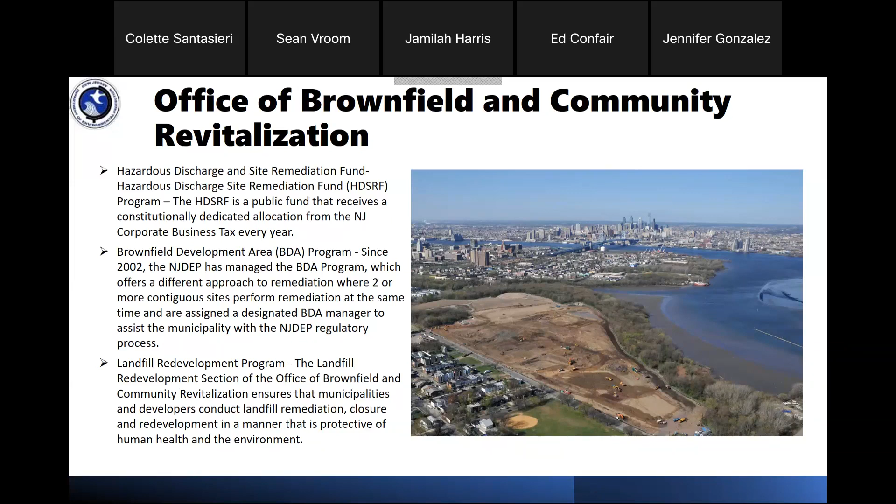The next section of our office is called the Community Collaborative Initiative, or CCI. CCI is a bridge between DEP and 12 municipalities in the state of New Jersey, and the projects we work on are partnership-based projects that promote quality of life in some of New Jersey's most distressed communities. CCI works in the community with a boots-on-the-ground approach, trying to ensure equitable economic development and enhanced public outcomes for these distressed communities.

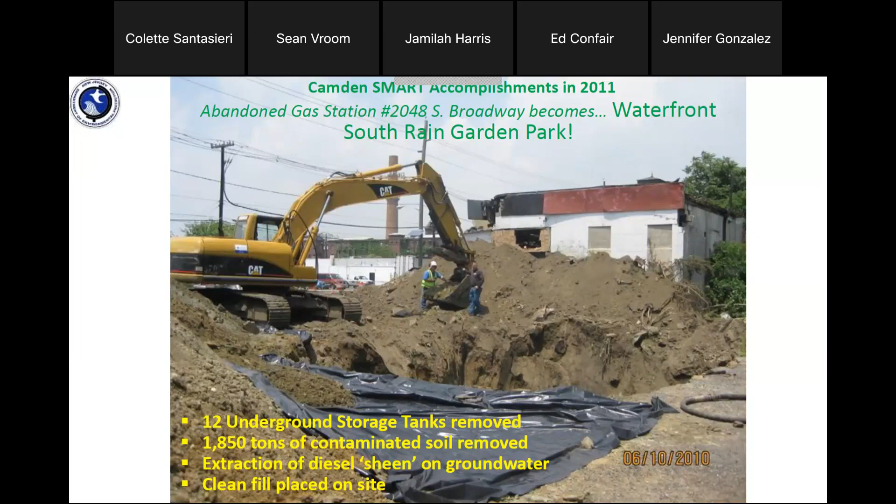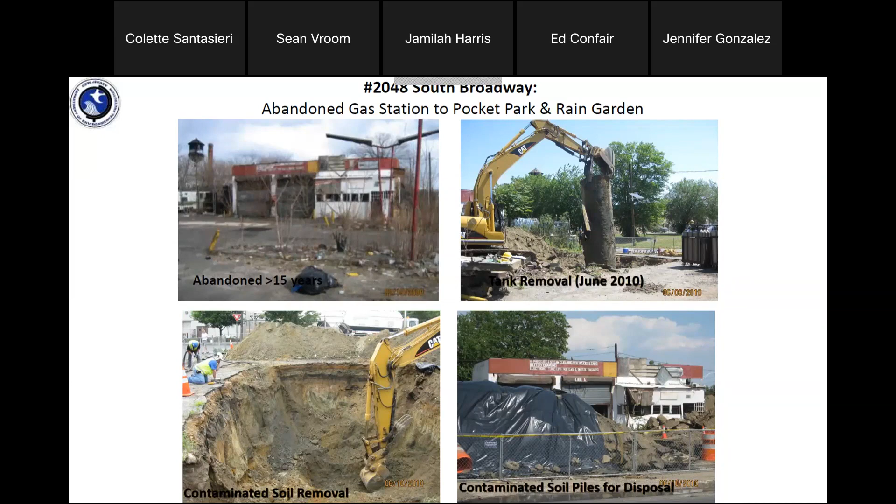This again shows the evolution of the site: the abandoned gas station, the tank removal and soil removal, and the beautiful garden that turned out at the end of the project. This was a first of its kind project for the state of New Jersey, where you take a contaminated gas station and turn it into a garden. A lot of parties were unsure that a project like this could be done, but once we had our partnerships and funding in place, we were able to move forward with executing this project.

This shows a schematic of the rain garden. There are a total of 4 rain gardens there, managing from 500,000 to 800,000 gallons of stormwater a year. The design was provided by Rutgers University, another partner. The park opened Earth Day 2012, and it provides about a half acre of green refuge and really a gateway jewel for this community that also manages local stormwater flooding.

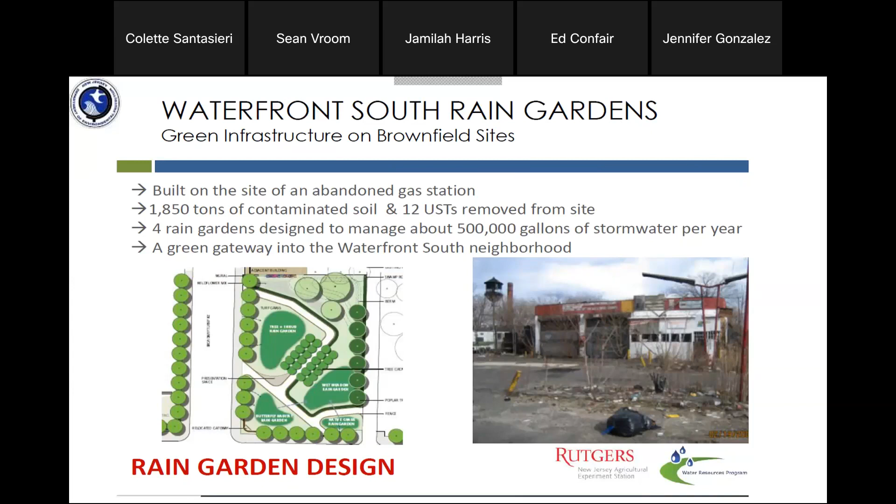Some of the hallmarks of this project were securing strong partnerships, sometimes working with nonprofits, and also being creative as far as how we were able to get the design done and the funding for the project. When you have all those pieces together, it really gives you an idea of some of the transformational projects that can happen in Brownfields.

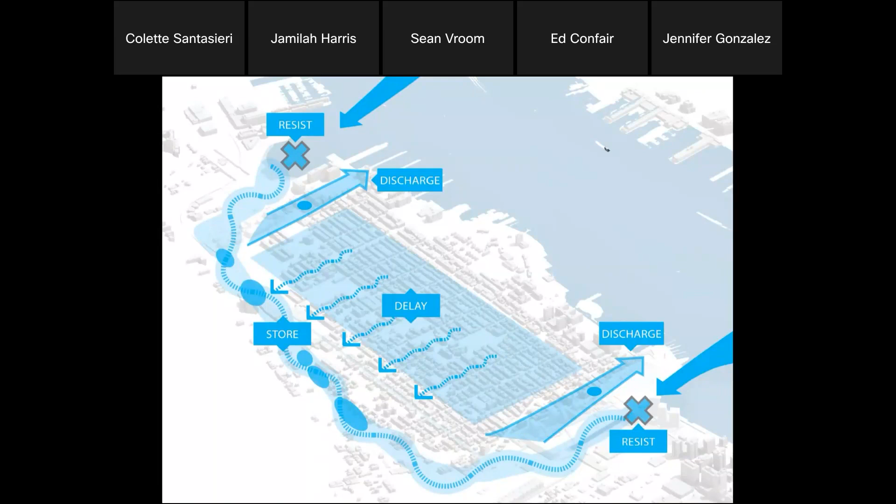So, as Jamilah said, it does take a village. You have to partner with other organizations. A lot of our resiliency efforts that we'll be talking about today are in partnership with the state, federal government, the North Hudson Sewerage Authority, and all of our local stakeholders and nonprofit organizations.

So I'm going to focus today on our parks as defense, because all three of these parks were brownfields and they are all now being redeveloped into resiliency parks.

We have one existing park at Southwest, our first park, opened in 2017. 7th and Jackson Park opened in 2019. And Northwest Resiliency Park is currently under construction as we speak, slated to open in 2023.

We'll start at the north end of town with Northwest Park, and that'll be the primary focus of the presentation, and I'll touch lightly on the other two towards the end.

So Northwest Park is in a location with historic fill. Most of Hoboken is historic fill. It was a low-lying marsh prior to 1910, then it was filled, which created this land for industrial development. From about the 1920s through 2000, it operated as a chemical manufacturing plant, Henkel Chemical.

You can see some images here of the historic factories. A lot of Western Hoboken was this industrial use, and actually our waterfront as well. Maritime industry was very significant.

When we looked to redevelop this site, it had been identified in our master plan as a new park. We have employed the strategy that every new park developed in Hoboken cannot just be a park, but can also be a flood mitigation measure.

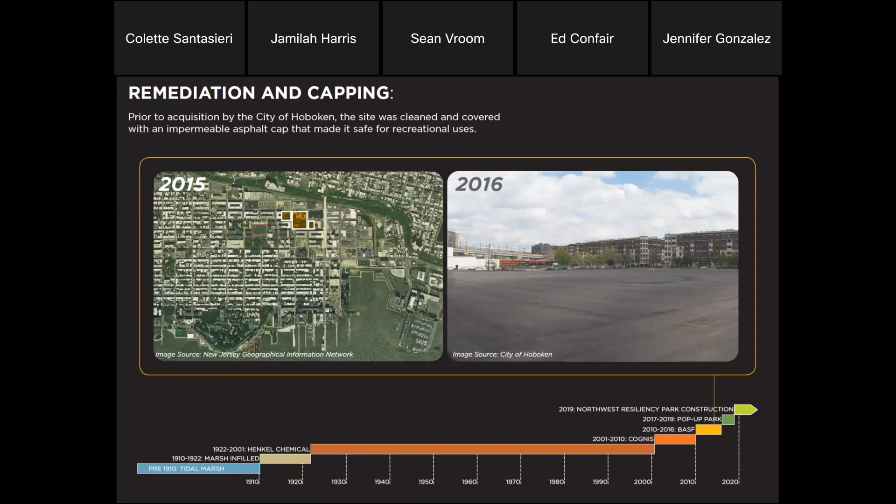During the period of design, we actually built a pop-up park, a temporary park that was on the site from 2017 through 2019, while we worked on a very significant engineering design with Ed Confair from ENLP, who will speak in a moment.

The design process was lengthy because this is a massive infrastructure project, and we wanted to make sure the public benefited from the park in that meantime. So we developed this pop-up park, and it was actually a great asset to do community engagement for the design of the permanent park.

The site had been temporarily capped, as you saw in the previous picture, and our design team's philosophy was effectively, let's keep as much of the soil on site as we can. So we needed to make room for the water.

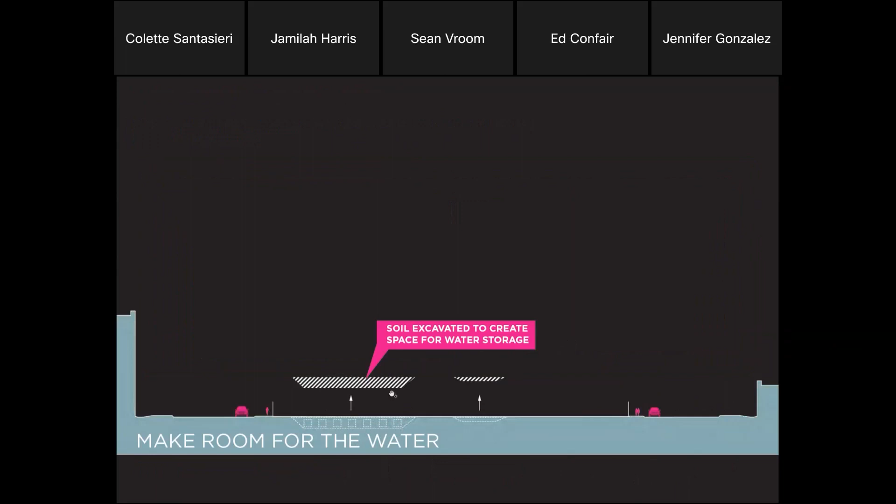This image depicts the underground tank that you'll see in a moment, where we excavated the soil and actually kept it on site to create topography and create a really interesting park design. Real kudos to ENLP and Olin, who developed this innovative park design for the city of Hoboken.

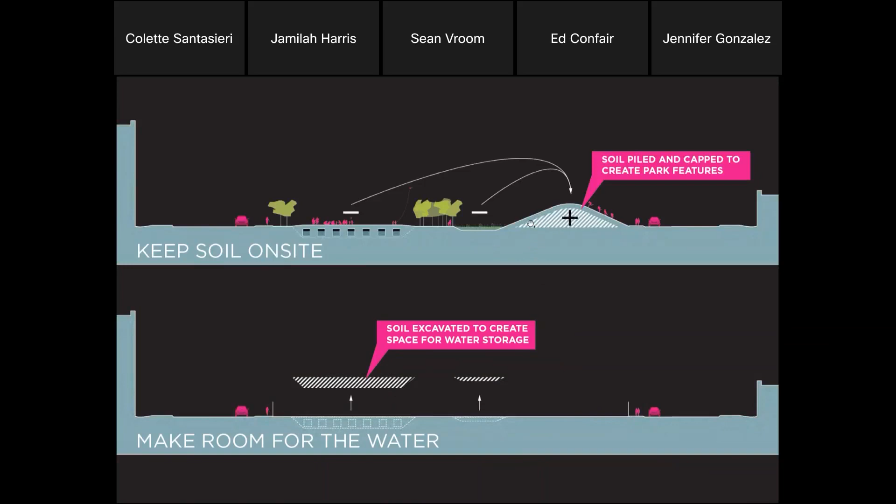The soil that was kept on site then became the topography, which was then capped with a variety of different surface treatments, whether that be pavement for plazas or sidewalks, grassy areas, or the fields you'll see in a minute. We had a variety of different types of capping that are being, as we speak, reinstalled on the site. The original asphalt cap done by the prior owner prevented rainfall and water from reaching the contaminants below the park.

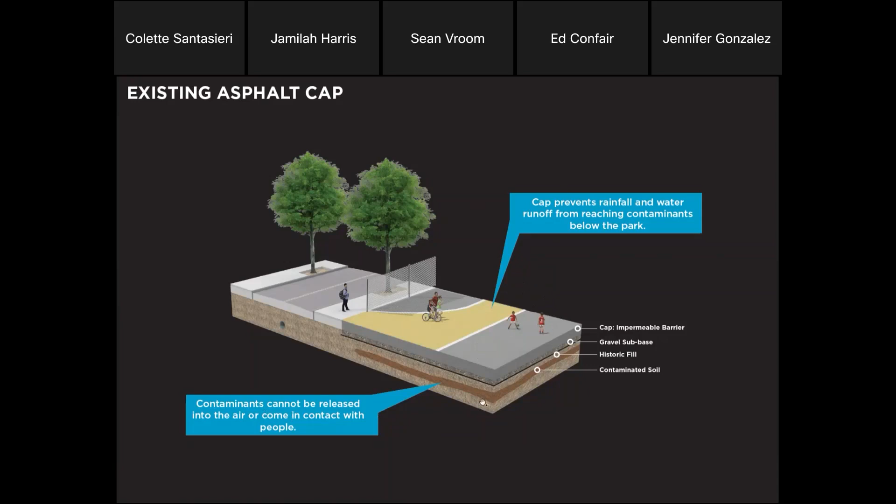So obviously we want to restore the cap. In doing so, we'll be installing at least 2 feet of soil and vegetation that will serve as an engineering control to protect public health and safety.

We'll also consolidate everything that can be kept on site. Of course, some soils did have to be removed, but we did manage to achieve zero net fill and keep as much on site as possible, creating a more natural cap for the site.

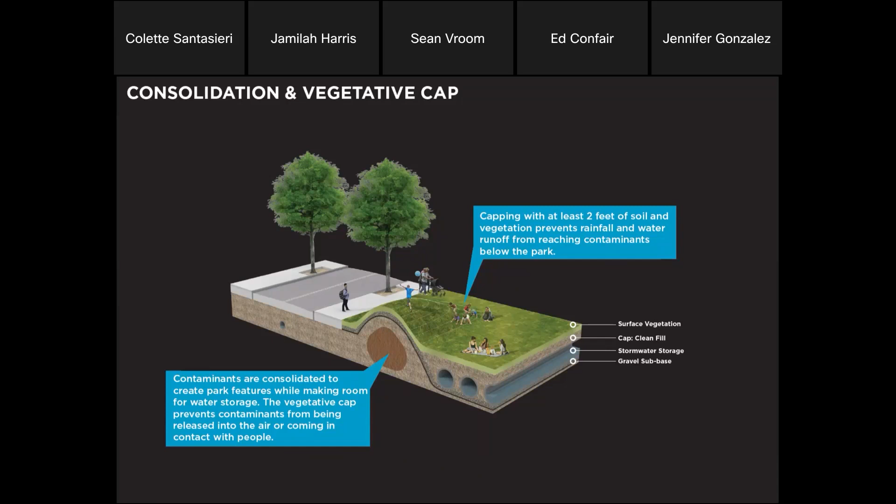And this is what the site will look like. This will be our largest resiliency park at about 5.5 acres, and it will feature a multi-purpose athletic field with a series of rain gardens, which we'll go into on other slides.

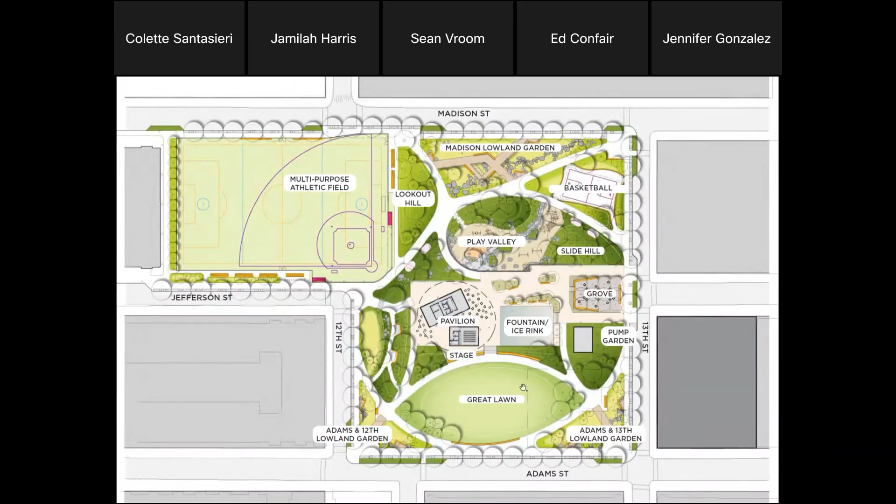A basketball basin that also stores stormwater, a play valley, and a central civic terrace that is actually the main elevated portion of the site, under which a lot of that soil was moved, and then a great lawn for events and movies. Here's a bird's eye view of the site, and I can't wait to put this next to what it actually looks like in 2023, but we will show you some current pictures of the site under construction.

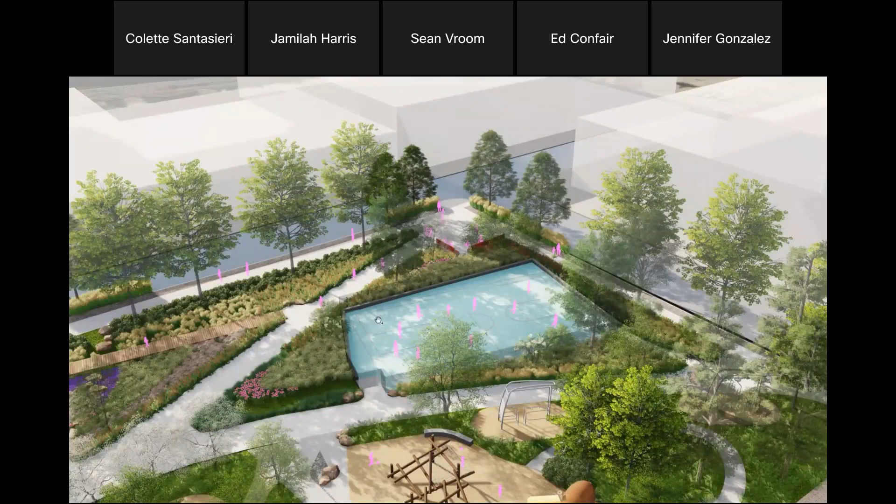This is the basketball basin that I just referenced. I wanted to give you two renderings that showed how this area was excavated and depressed, whereas this civic terrace was actually elevated. We were moving soil around efficiently to make sure that we met the net fill requirements, but we also had to haul away as little as possible.

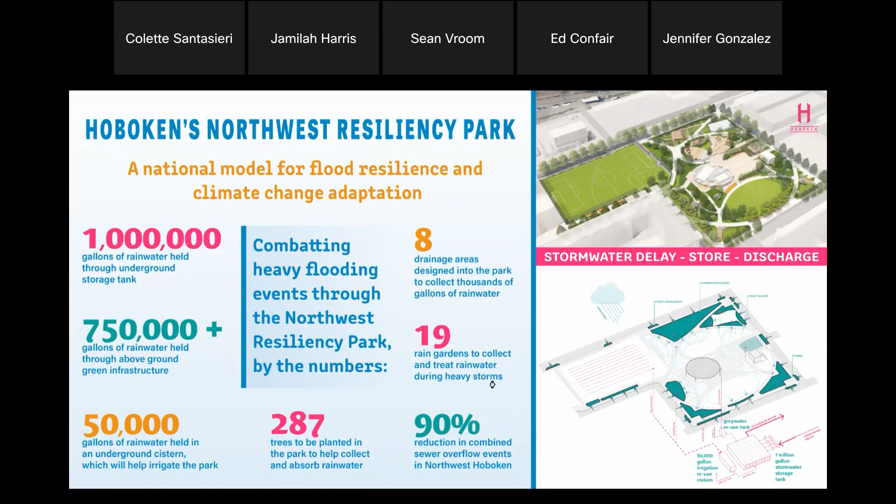In summary, here's the impact of the park in terms of climate adaptation. We are storing 1 million gallons of water in an underground tank. We are also managing more than 750,000 gallons of stormwater on site through rain gardens and green infrastructure. There's also a cistern that will be used to irrigate the site, storing 50,000 gallons of water. We have about 300 trees that are going to be planted on the site, and a 90% reduction in combined sewer overflow events as a result of this park's stormwater management measures.

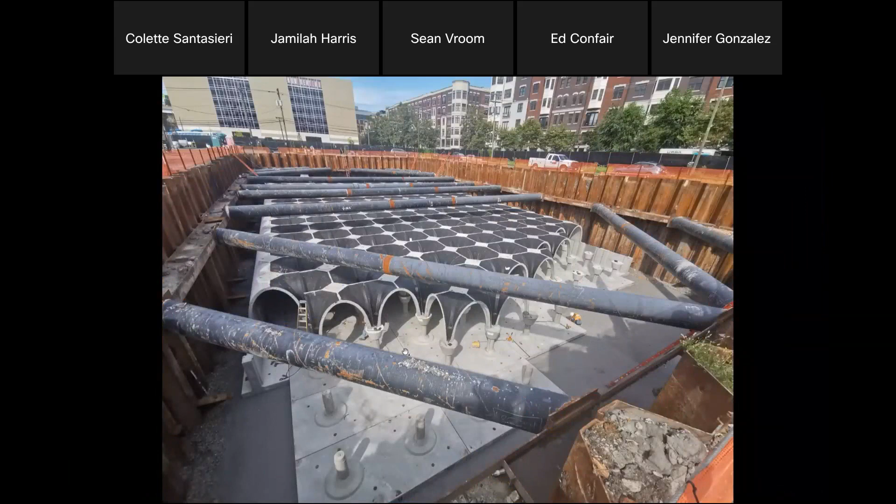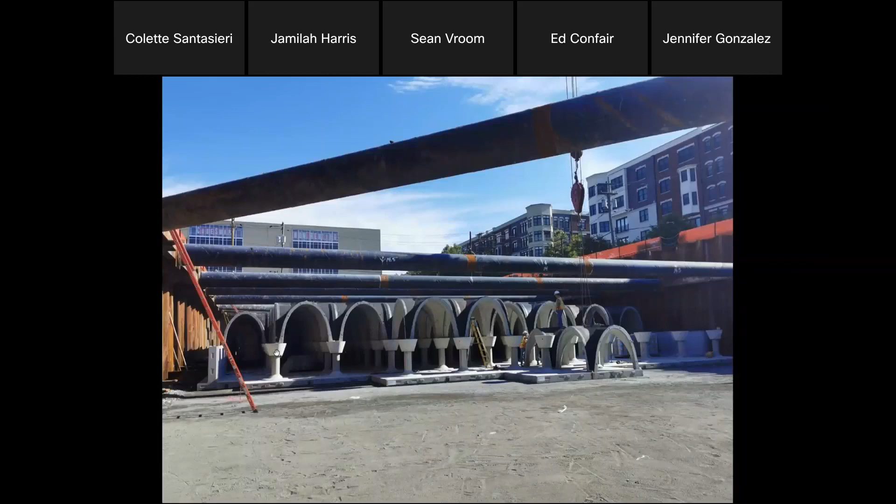Here's a view from the north. It is almost the size of a city block. This park is kind of a super block, and the tank takes up about half of it, but you would never know it from looking at the park as we stand today. Here are the chambers, a view from underground, and this is actually a view from inside one of them—so, the tank, not just one. Those are the features underground doing the flood mitigation work, while also keeping this brownfield site capped for recreation purposes, and turning it into a beneficial use for our residents who are demanding open space.

Moving on to 7th and Jackson Park, the unique thing about this site was that it was entirely developed by a private developer. This field is on top of a series of PVC pipes that you'll see in the next slide. It's just about a 2-acre project. It stores 466,000 gallons of stormwater runoff, developed by a private developer and then turned over to the city.

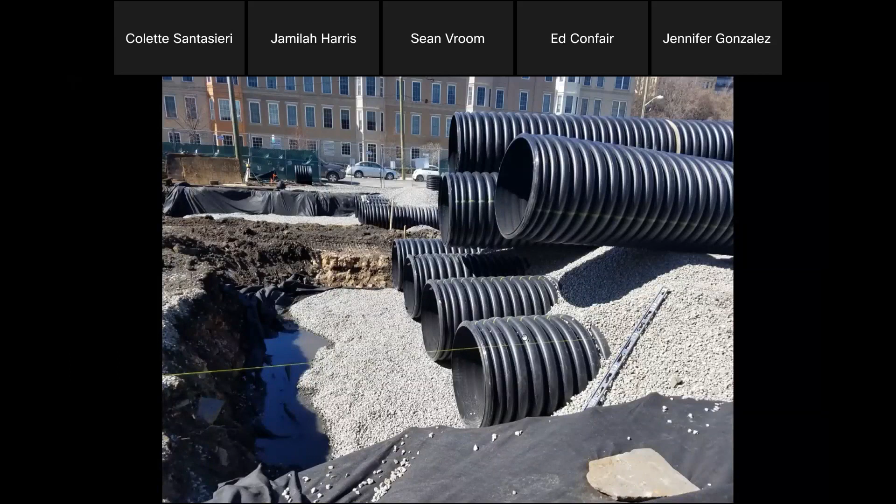It was part of a larger redevelopment project. This is the image of the types of pipes that are actually underneath that field. We were able to do this at no cost to the taxpayer. Through this redevelopment process, we were able to leverage an innovative way to finance the project, but also have the project built by a different third party. We now operate and maintain the park, in partnership with the North Hudson Sewerage Authority, which maintains the underground infrastructure for stormwater management.

Very similarly, Southwest Park, our original resiliency park, was also a brownfield. This is what the park currently looks like at the surface. All of these pavers are permeable pavers. These are rain gardens—there's a series of rain gardens and stormwater trees. There's also a cistern on site and underground detention, similar to 7th and Jackson, which manages, all told: the permeable pavement, the stormwater trees, the cistern, and the tank—altogether just under 200,000 gallons of stormwater management on the site.

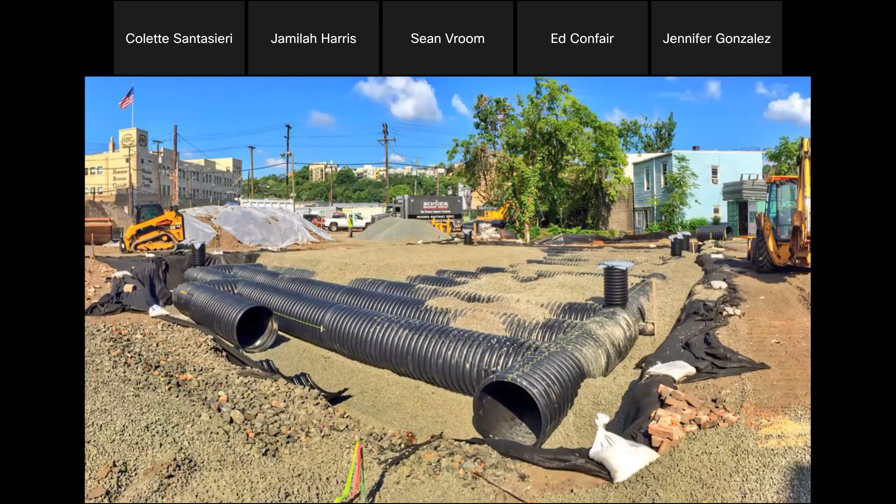I should have noted that the former use at the 7th and Jackson Park site was a Levolor blind factory. And the former use at this property was a parking lot. There were previous industrial uses prior to that.

So that's a little bit about our brownfields remediation, and I welcome you to email me with any questions. Our website is there, and on that website you can find links to specific project pages for each of those 3 parks, as well as our overall flood mitigation and climate adaptation strategies.

Okay, thank you so much, Jennifer. I want to thank Jamilah and Jennifer for giving us some great examples. And as you can see, they're very different examples, and we chose those by design.

Jamilah's example was a small site—a gas station that had been sitting for years, and the community wanted something done. Plus they had flooding issues and needed something addressed there. Whereas the example of Hoboken was a citywide strategy, very different, looking throughout the city at how to handle floodwaters, and then using parks as a defense strategy while looking at their brownfield sites.

The reason we chose these very different examples is to show communities that there are many different ways of dealing with these issues, and many different ways of viewing the redevelopment of your brownfields through the lens of resilience. So thank you again, Jamilah and Jennifer, for those examples.

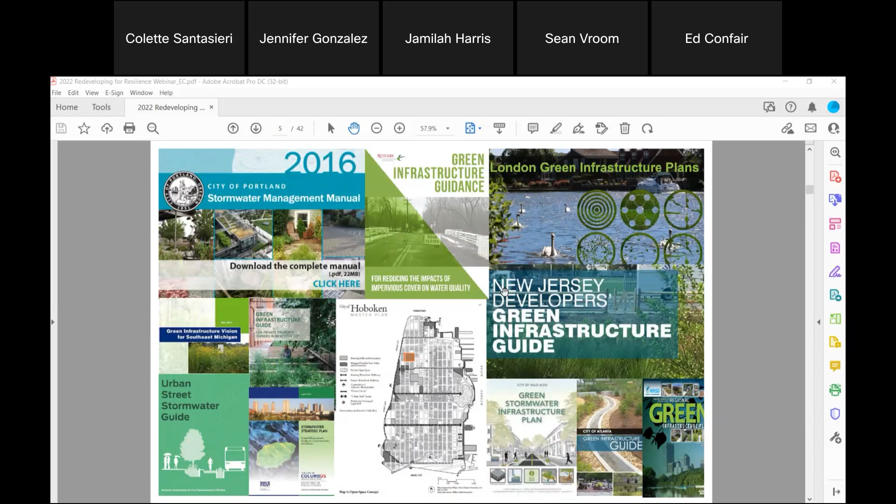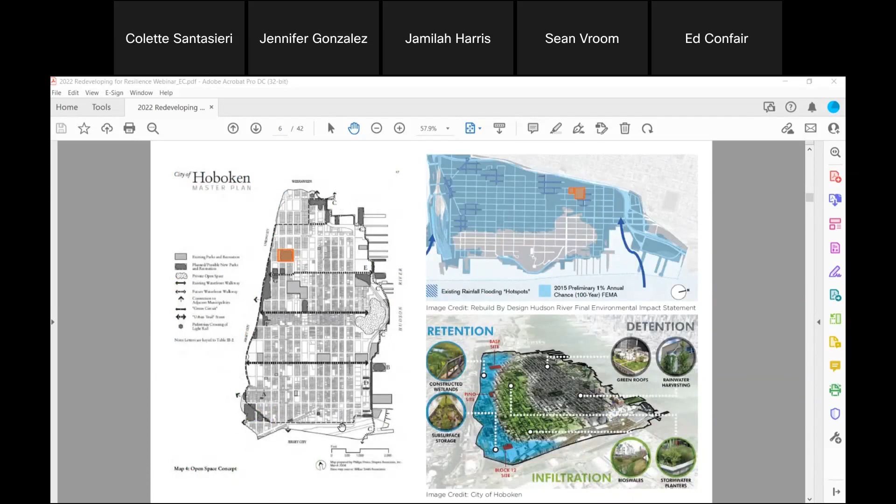To use an example, looking at what Hoboken did with Northwest Resiliency Park, the point I want to make is to look at both your master planning, your comprehensive plans, your recreation and open space inventories, and overlay them with the most recent flood mapping and your infrastructure inventory, such as your CSOs, if you're in a CSO area. Coordinate with your municipal utility authority on where your sewer sheds are, where your stormwater systems are. The point is you're looking for synergies and overlap. So from a municipal point of view, you want to find where you own land, or where there's blighted or brownfield land that can be useful where you're also having flood or resiliency issues.

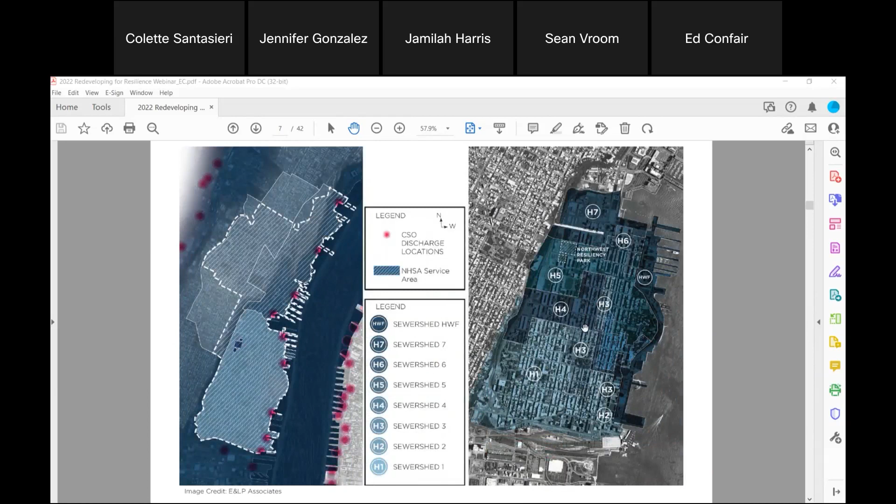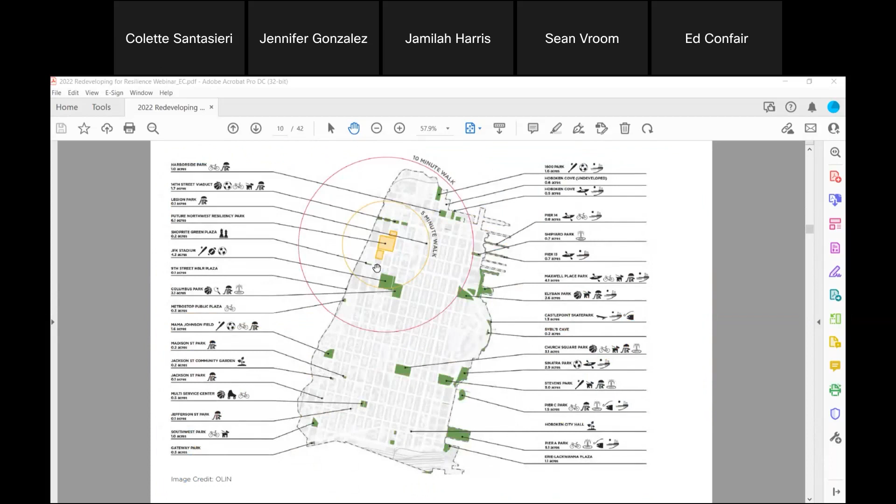And then you want to pair that with the social aspect. Community engagement is an incredibly important part of these projects—getting public buy-in, making sure people feel safe, that you're creating places of refuge, that you're improving their neighborhoods, and that you're listening to them about what they want to see on these areas as they're improved, programming the sites in a way that fills gaps for amenities that may be missing in neighborhoods.

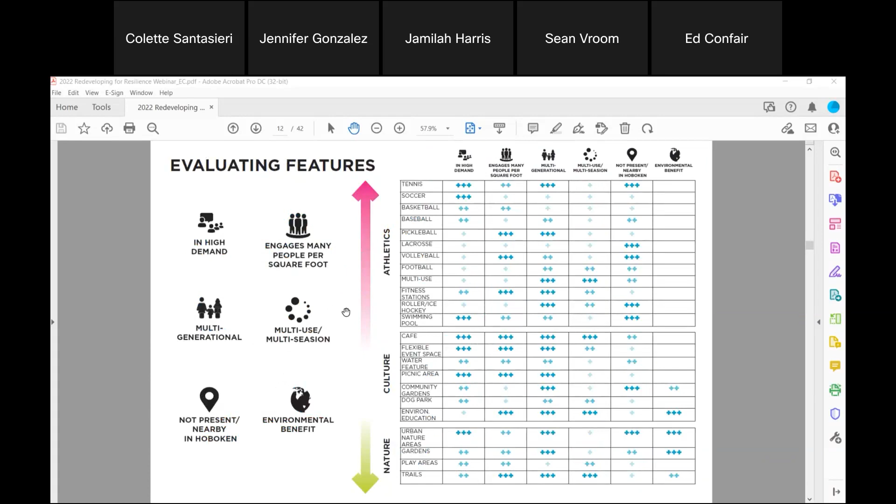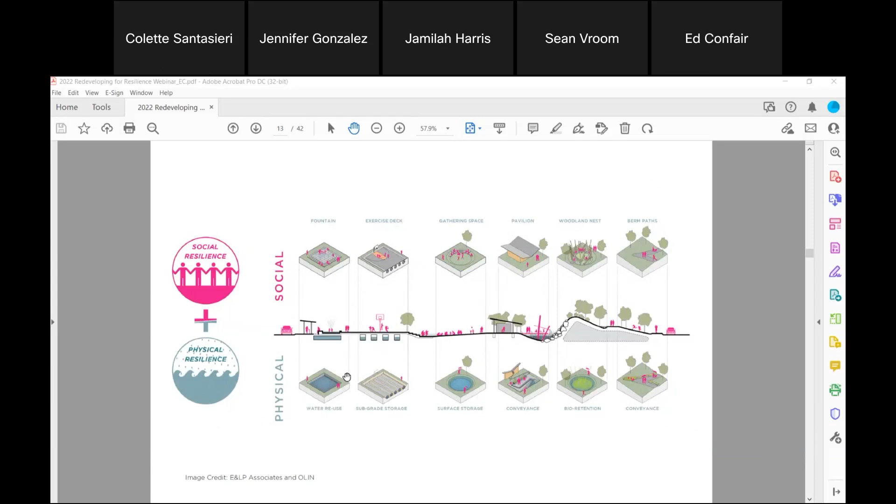Online surveying is a great tool, and you'll eventually develop a suitability analysis of what makes the most sense at different sites. If you build these layers together, I promise you there's a functional stormwater resilient design—whether it's something below grade, surface, a system for reuse, or a building green roof, etc.—that will match up with your community's desires for gathering spaces, community center buildings, playgrounds, sports courts, fountains, etc. There's a stormwater solution that goes along with each one of those social amenities.

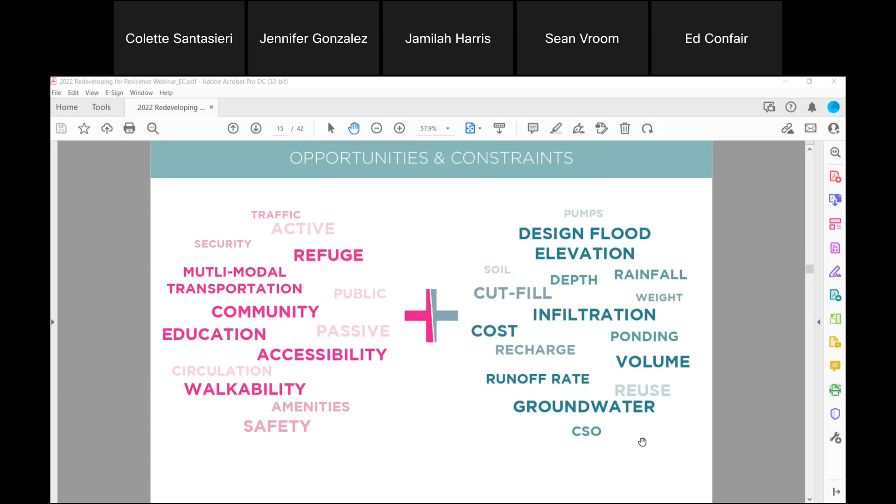So the first constraint: you're in a low-lying flood hazard area. As Jennifer showed with the Northwest Resiliency Park, you've got an area that floods, whether it's a minor case or an extreme case like Hoboken.

You want to approach this at two different scales. You've got green infrastructure, rain garden systems, shallow vegetated systems. These are kind of small surface-level systems, and they aren't going to manage a superstorm Sandy-type event. They're going to take care of your 90% rainfall event, which has a big impact on your communities and takes care of local nuisance flooding. Then when you have a superstorm Sandy event, you're looking at larger flood mitigation projects that might involve below-grade tanks, pump stations, etc., to mitigate.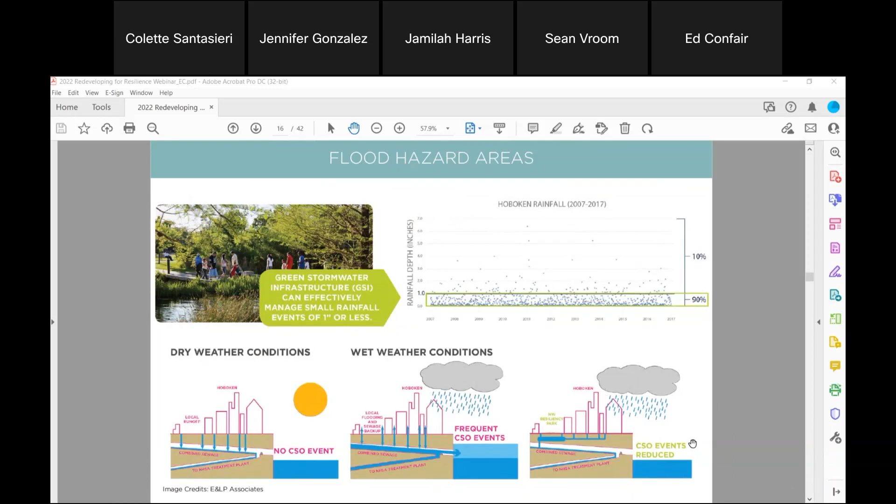If you have a structure on your site, you're going to look at floodproofing. There's a variety of ways to approach this. You can wet floodproof a building, meaning you're allowing it to get wet—and I'm saying building, but it could be any type of structure: playground structure, pavilion, bandstand, etc. If it's in a wet area, you have to know that the materials you're building with can withstand that. You can also dry floodproof a structure, which means you put a shell or materials resistant to water up to whatever your design flood elevation is.

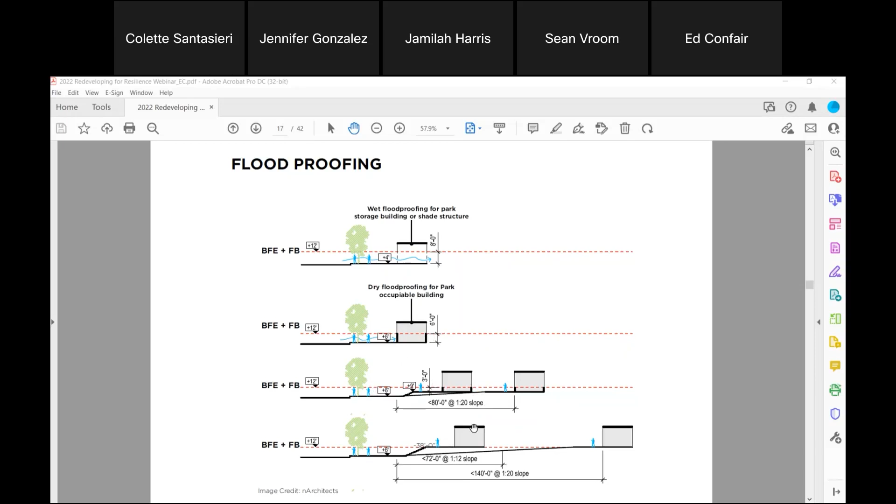You can do a hybrid approach where you try to raise the structure as much as possible but acknowledge a certain height is going to get wet. Or you can attempt to raise the structure out of the floodplain completely. This might result in what you're starting to see as a typical building condition in condos in Hoboken or Jersey City, where you're walking down the street and seeing stairways up to the first floor of residential habitable spaces, elevated above street level due to design flood elevation considerations. Things like parking, where it's okay for water to flood, are on the ground floor, while people's habitable living spaces are elevated. These are becoming common architectural strategies.

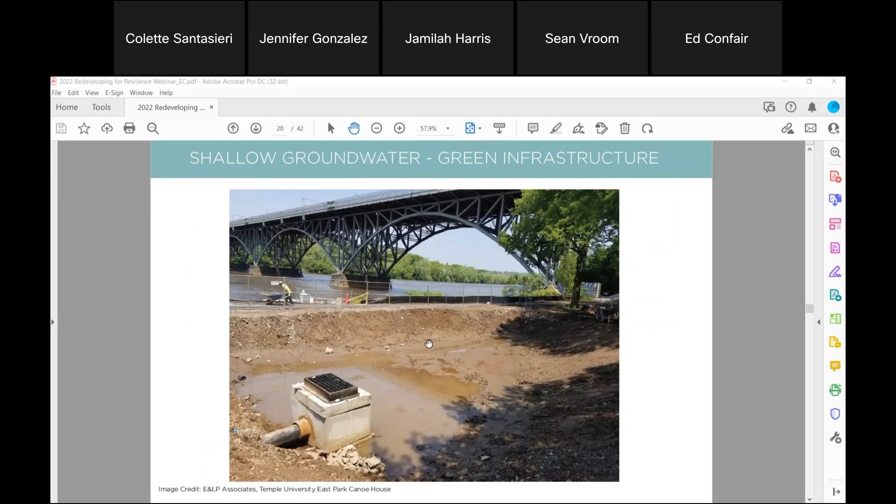Another common constraint is shallow groundwater. If we're in a low-lying area and groundwater is elevated, how are we creating enough storage space for stormwater if the groundwater is already taking up that location? This is an example of a site that floods frequently on the Schuylkill River in Philadelphia. I'll come back to show you the after, but one common solution is to line a system and have an under-drain layer above the liner, so it's not infiltrating but still creates storage capacity.

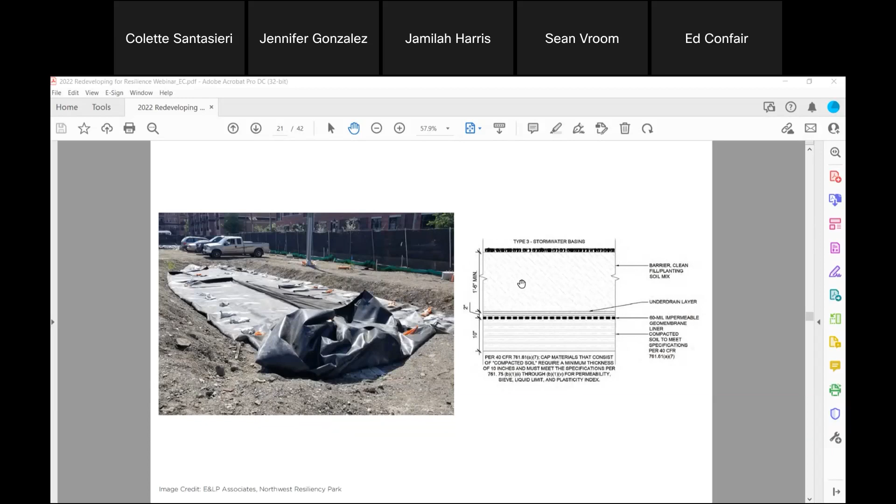The important thing here is to make sure you're balanced with the weight of soil, under-drain, and planting material above the liner layer, so you have enough weight to resist the hydrostatic pressure of the displaced groundwater pushing up below the liner. You can't go fully into the water table, but you can go in a foot or so with a lined system if you have enough weight of soil on top of it. This goes back to the Schuylkill River site.

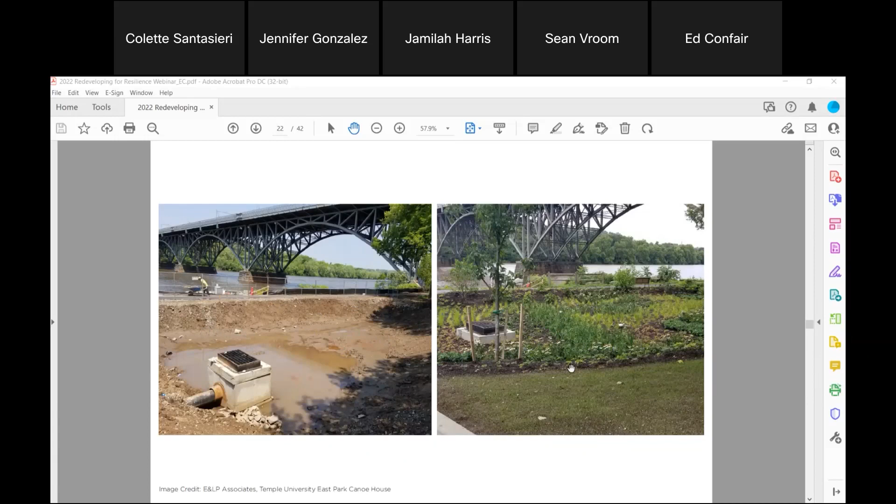This is what was done at this site. There was a liner, about 6 inches into the water table, a stone under drain layer, and then the planting soil profile. This site regularly gets inundated. It manages the small events, and when the Schuylkill jumps its banks, it's none the worse for wear. This site is about 4 years old now, still functioning very well.

From a design perspective, we always want to ask what are the stormwater systems doing when it's not raining. In New Jersey, we probably have 50, 60 rain events per year, so that's a lot of days where the systems are actually dry. The more we can activate them with floating decks, boardwalks, and pathways to get people into the systems, engaging with the created natural environment, the better. So this is an example of how to do that.

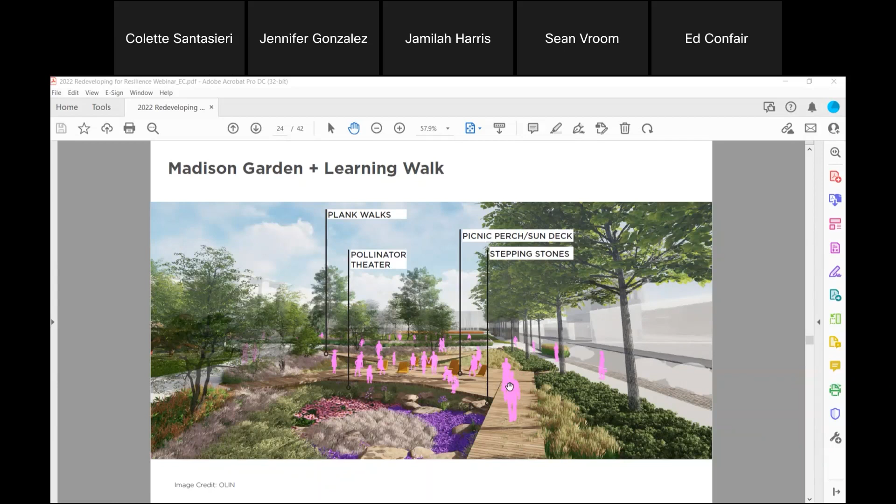Building on what Colette said before I started, you've got to know if you're in a small, at-grade rain garden situation like Jamilah showed, or in a city or neighborhood-wide flood mitigation strategy like what Jennifer showed, because they'll have vastly different engineering constraints and costs associated with them.

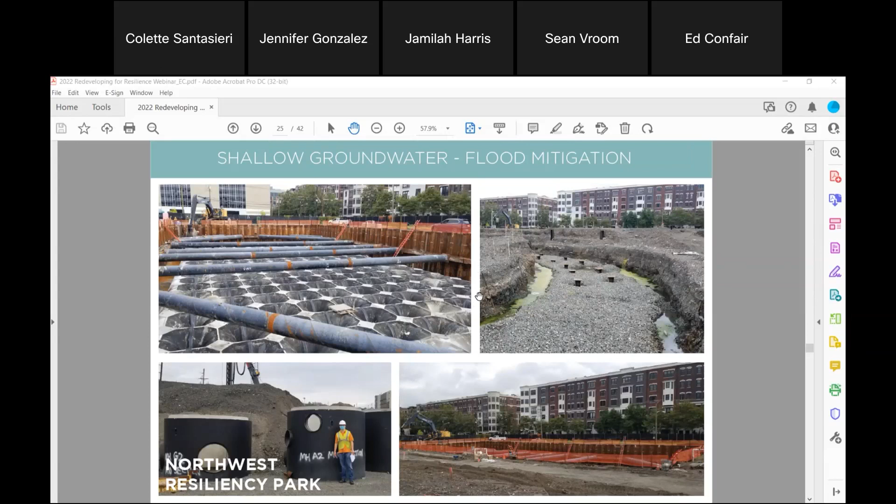Another frequent brownfield issue is no infiltration. These can often be clay soils — there might not be native soils left, just compacted historic fill and construction debris. You might have contamination that you don't want to infiltrate because you don't want to mobilize it and have it travel off-site by introducing stormwater. So this is a common constraint to run into.

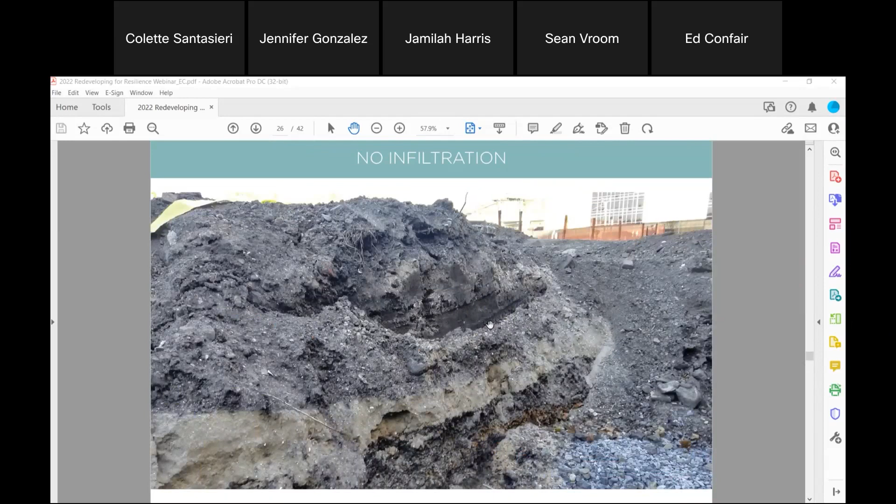The liner solution I already mentioned is one way to deal with this. Another option is to focus on water quality. You can still excavate, as Jamilah and Jennifer showed in their photos, to create space for underground or surface storage, but you want to make sure you're still getting the water quality benefits. There are different technologies you can wrap these underground pipe systems in to still get your state-required TSS removals and nutrient removals. You can really focus on the soil media you're backfilling these systems with to make sure you're still getting all the water filtration aspects in addition to the volume storage.

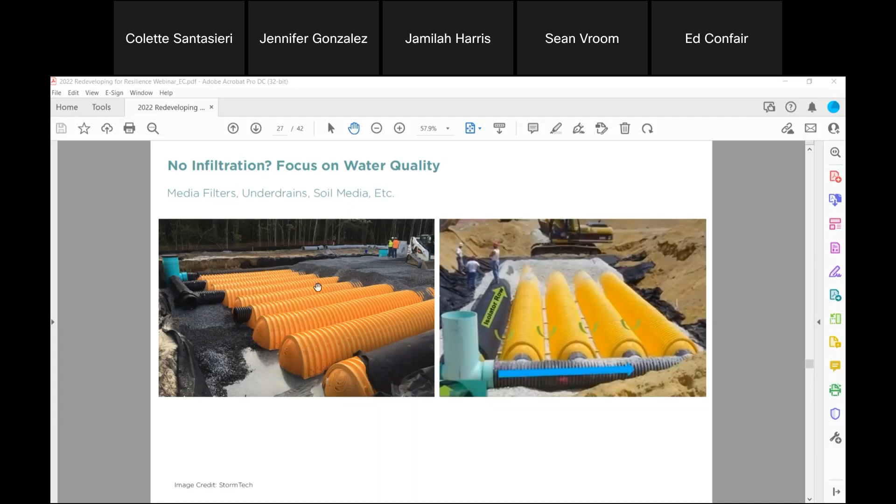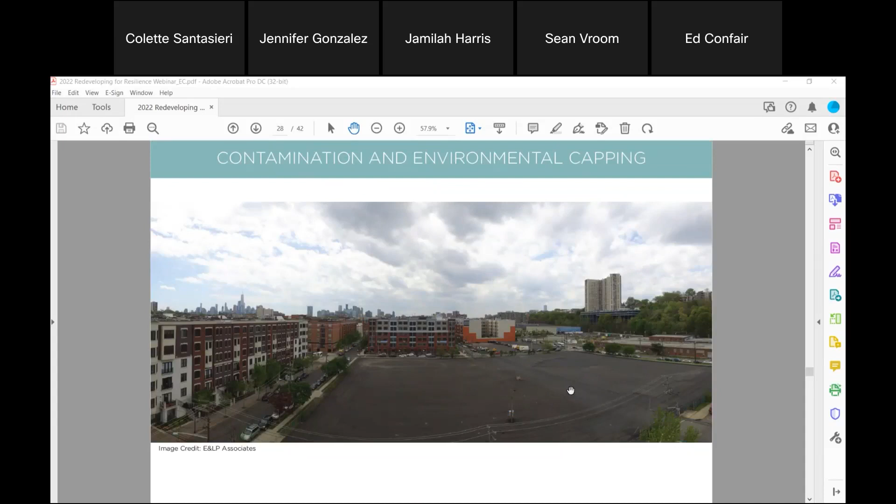That leads right into dealing with on-site contamination and capping. It's very common, depending on the outcome of a soil investigation, to have to cap a brownfield site after it's been redeveloped with a new use. So you need to do very thorough soil and groundwater sampling, and you'll work with an LSRP, a licensed site remediation professional in the state of New Jersey.

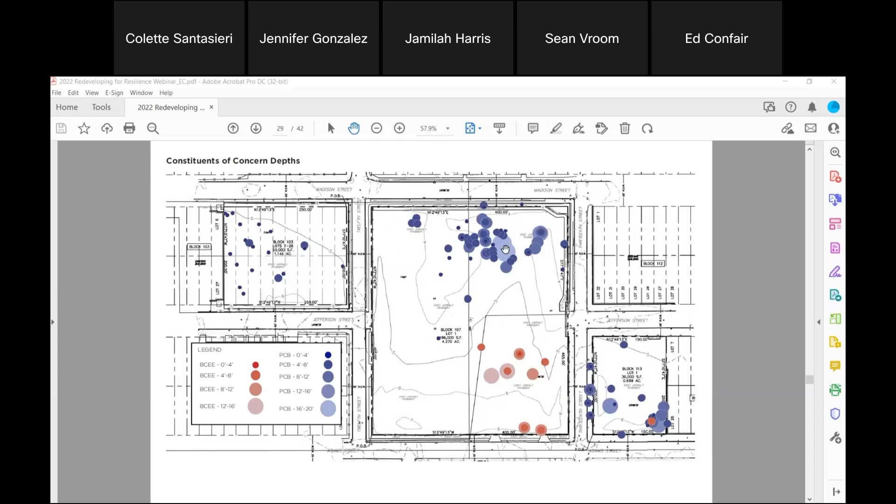This is an example of the plot of the investigation on the Northwest Resiliency Park. You're going to look both horizontally for where you're getting hits in plan, as well as depth-wise to know how deep you might be constrained. You might find that if it's a small area, the best thing to do is excavate it and remove it off-site, like Jamilah showed, or it might make sense to keep it on-site, like Jennifer showed.

If something's widespread, you might be in a situation like on the left, where you have a relatively level area that you're capping with asphalt or concrete, putting a sports court or plaza on it. Or you might consolidate it into an area to create topography, and then simultaneously free up other below-grade area for stormwater storage or other uses.

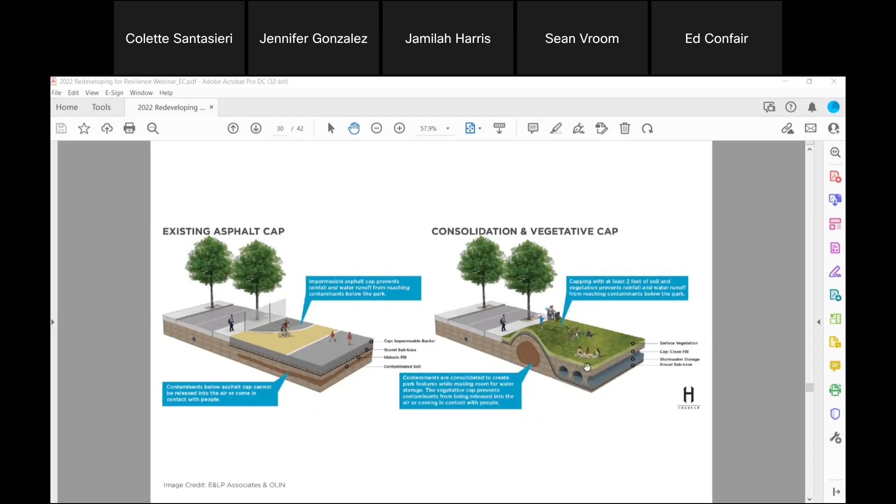I want to show another example from 1600 Park Ave in Hoboken.

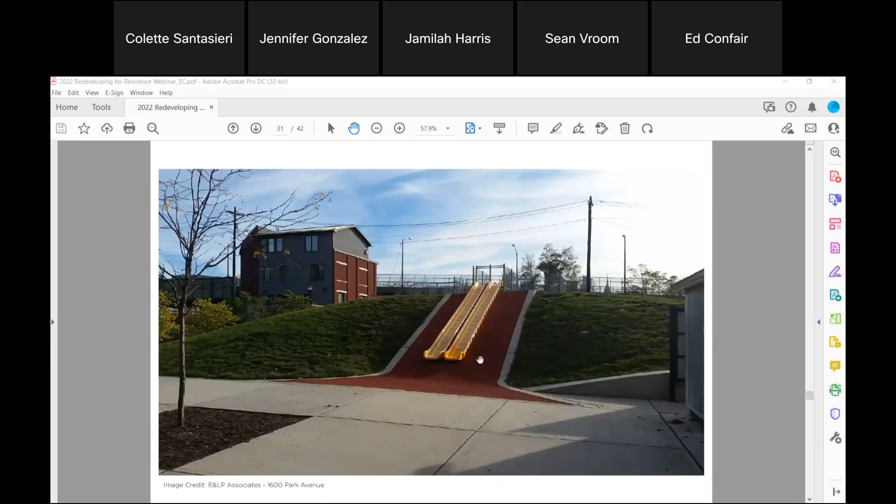This is an example Jennifer brought to our team's attention at the start of the Northwest design process: a capped soil mound to keep material at the location it was excavated from, while still activated with a public amenity. The pop-up park, before construction on Northwest started, is another example of activating a hardscape cap. In New Jersey there's a term, presumptive remedies, in the remediation rules.

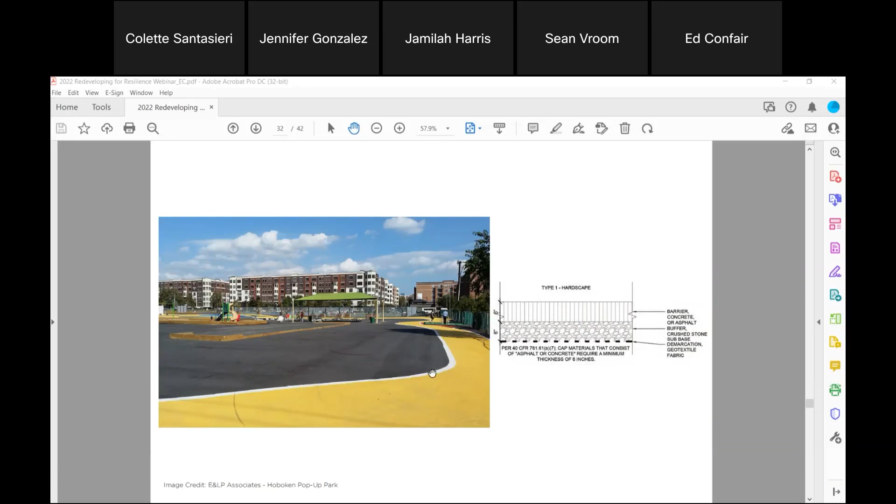These are different depths acknowledged as being effective environmental caps. So 6 inches of asphalt is an effective cap, and you can still make a vibrant public place out of it. And then the basketball basin.

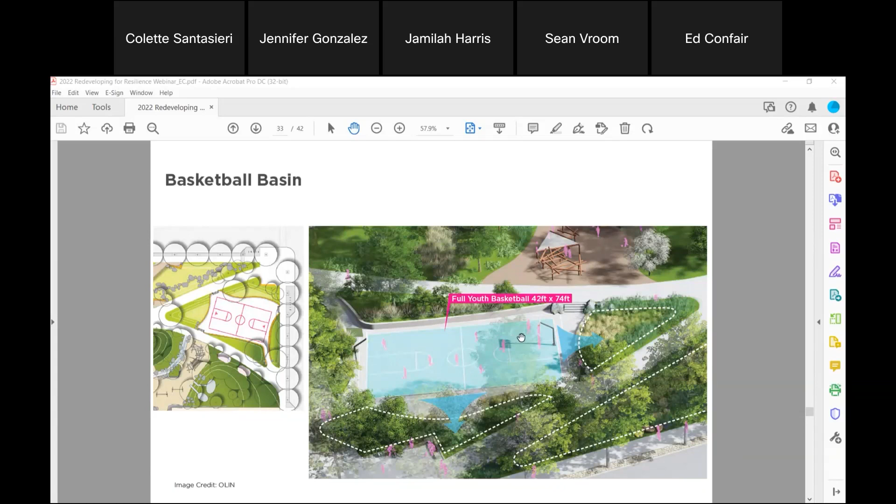I wanted to touch on this one from the design perspective, because it's one of the more unique and exciting features of the Northwest Park. This area provides 2 feet of stormwater storage while also having a lined bioretention basin cap-compliant design surrounding it, and the asphalt court surface itself is a cap. So you've got two different caps transitioning between them, serving an important stormwater function while still completely activated as a usable public amenity. It really hits everything all three of us are talking about today.

Another common way to activate a brownfield site and effectively cap it is multi-purpose athletic fields. With synthetic turf, stormwater can go right through, and your only limitation is how deep you can go and how much stormwater you want to store beneath these fields. You can fluctuate the size of the storage pipes in the stone media. If you're worried about contamination, you can line the system. If not, and you can infiltrate, you can leave the liner out and provide storage and infiltration, which is the best case scenario. These areas still get heavily programmed and activated as important community spaces.

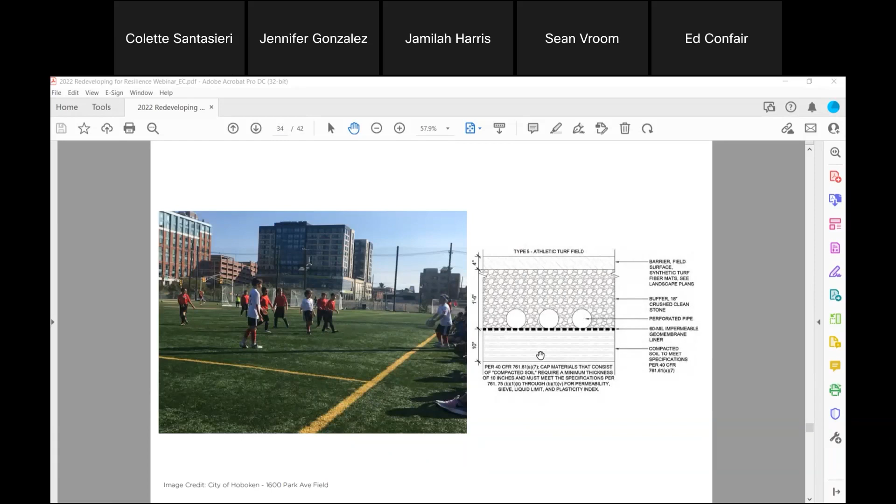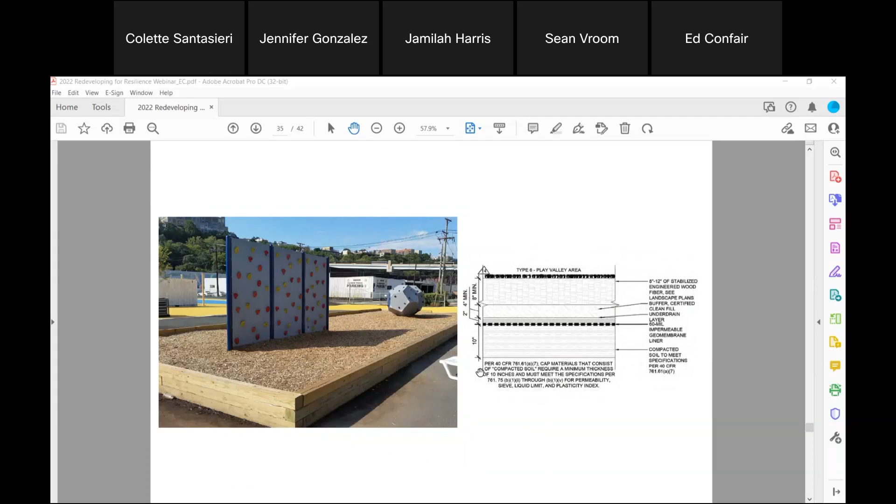Again, another option: engineered wood fiber. As long as we have these upper material layers, there's a lot of flexibility in whether it's soil, planting, wood fiber, permeable pavements, cobble pavers, etc. We can build up additional depth below those to become cap compliant. This is an example of building up from a site, which can also be done at grade.

An example from the Northwest Park design: the lowest area on the site is actually the playground area. This is about an acre of engineered wood fiber underlain by a stone and pipe underdrain layer, then an HDPE plastic liner and clay below it as the capping system. It provides stormwater storage, and the overflow goes to the on-site cistern that Jennifer mentioned.

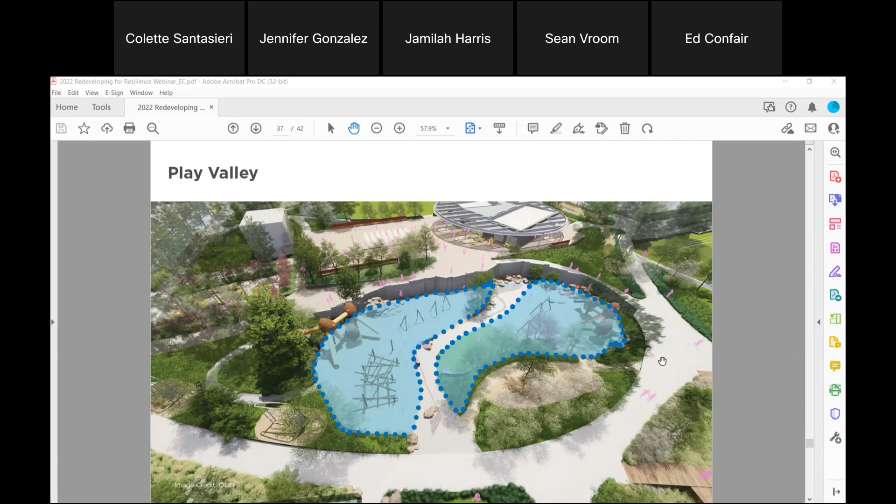Think linearly if you're space constrained. Not all stormwater systems need to be a basin—you'll hear that word a lot. You can fit bioretention systems in roadway medians or along the edges of roadways, like on Washington Street in Hoboken. This is an example of a stormwater bump-out under construction at the Northwest site.

There are a lot of ways to manipulate a standard detail for a tree trench. If there are contamination concerns, you may want to line it, as this detail shows. If not, the important thing is just to have a continuous linear trench for plant and tree root growth, allowing infiltration to take place.

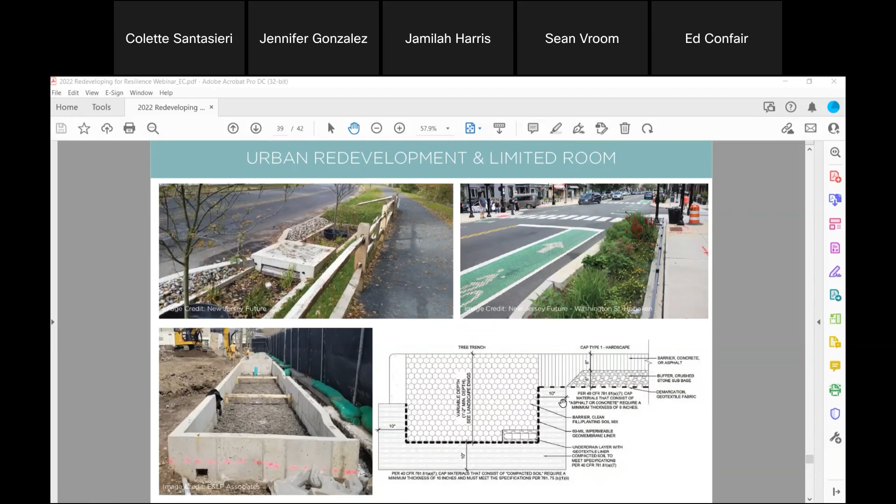You still get all the green infrastructure benefits from long linear systems as you can from a concentrated, smaller footprint. Technology-wise, providers of stormwater system devices and products understand that we're running out of space and sites are space constrained. So think about using things like flat drains—much wider and shallower in depth, an alternative to a traditional circular pipe.

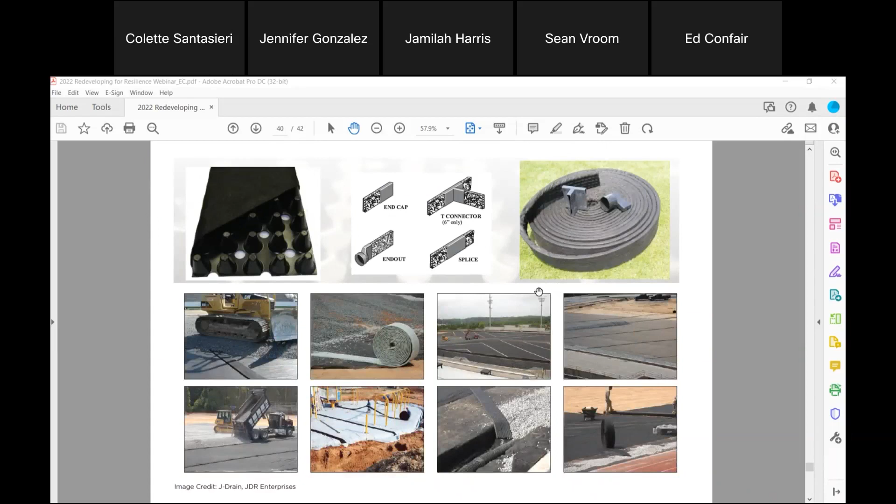And they might save you 5 to 8 inches on depth in an under-drain system. Really great option. If you're in a more structural application, on an industrial site or manufacturing, you're going to have a lot of truck traffic in the redevelopment scheme coming through.

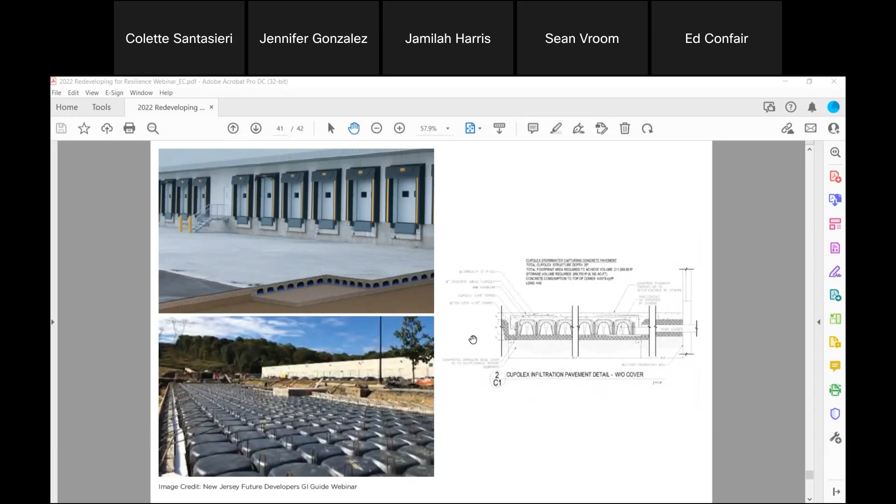There's also really shallow structural systems. I've seen these plastic grid systems as shallow as 6 inches to work with a paving profile, so they're also really space efficient. They're near 100% voids, but they're structurally sound and will take truck traffic. So there's a lot of new technologies to be aware of and that you can deploy on sites as well.

So just in summary, plan at the front end, make sure you're overlaying all those different maps that are available to you. Be prepared for typical site constraints. Make sure you've done your due diligence in your soil and groundwater testing. And then be ready to use a variety of kit of parts.

Each one of the examples I just showed has been put into effect in some way in the Northwest Resiliency Park. So it's not a one-size-fits-all approach to resilient design. And that's it for me.